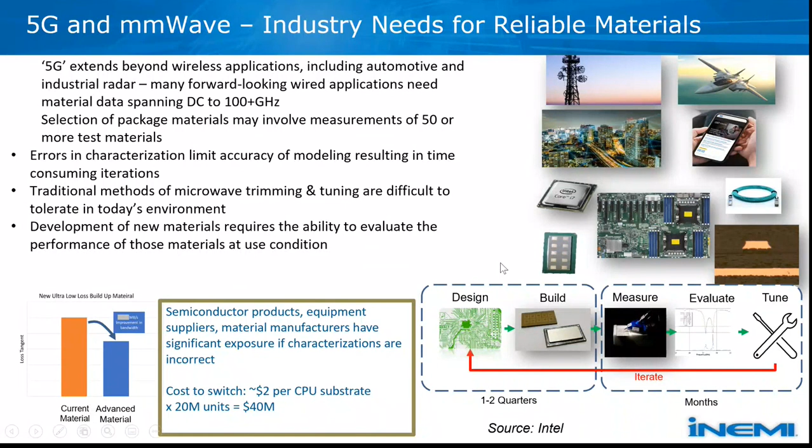And so what we said in the beginning is, what's really the problem statement? As I mentioned before, these materials pose challenges in that there is no consistent methodology for measuring key parameters such as the transmission loss and the permittivity of materials at higher frequencies. Throughout the industry, people have been using these materials, but there are many different characterization methods. Different approaches are used, using different fixtures, test methods, sample preparation, etc. And there was really a lack of consistency for data measurement as well as data analysis and extraction.

So in the beginning of the project, this industry group said, okay, we needed to come up with the following tasks. Firstly, we wanted to benchmark the current industry best practices, coming up with a report outlining the current measurement methods, reference standards, sample preparation, etc., which formed the basis for recommendations for how to reliably measure materials, which is actually in task 3.

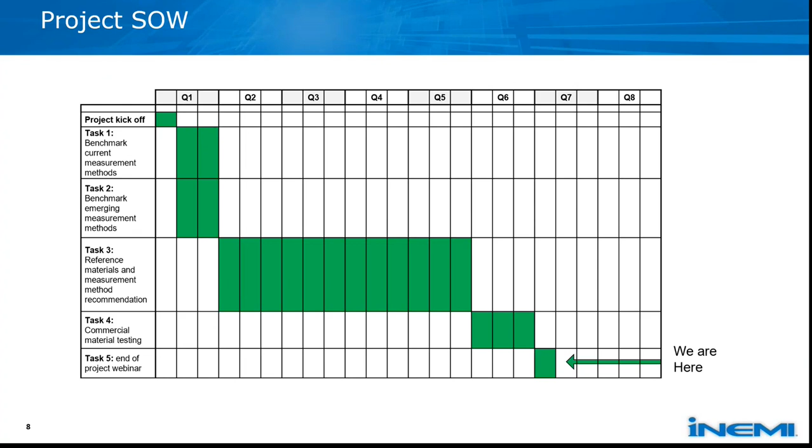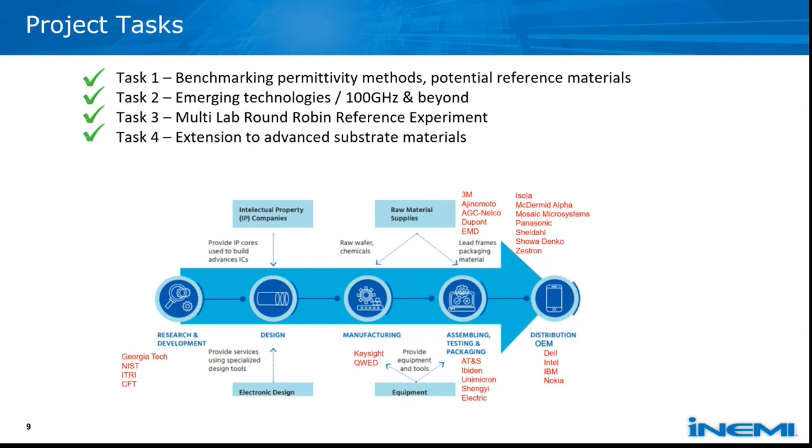So with that, I will hand it off to Marcena, who's going to take us through the next set of the presentation. Marcena? Yes, thank you, Urmi. I will say a few words about task 1 and task 2. And let me start, obviously, with task 1, which is benchmarking current measurement techniques.

Within this task, as you probably all know, with new material coming through the development process and into use, we need to carefully consider how to approach its characterization, which test fixture to choose, which measurement methodology will be the most suited one, how to fabricate the sample to make sure that we are getting high accuracy of our characterization. And of course, on the market there is a wide spectrum of available solutions, and the decision which to choose is not so obvious. So within task one, we wanted to benchmark the currently existing methods to answer some of those questions.

And we focused on resonant measurement techniques, which include split post dielectric resonator, split cylinder resonator, balanced circular disc resonator, and Fabry-Perot open resonator. All of those techniques span a very wide frequency range, and you can see how each of the techniques is situated over the frequency range. The most broadband, going up to over 100 gigahertz, are two of them, Fabry-Perot and BCDR methods.

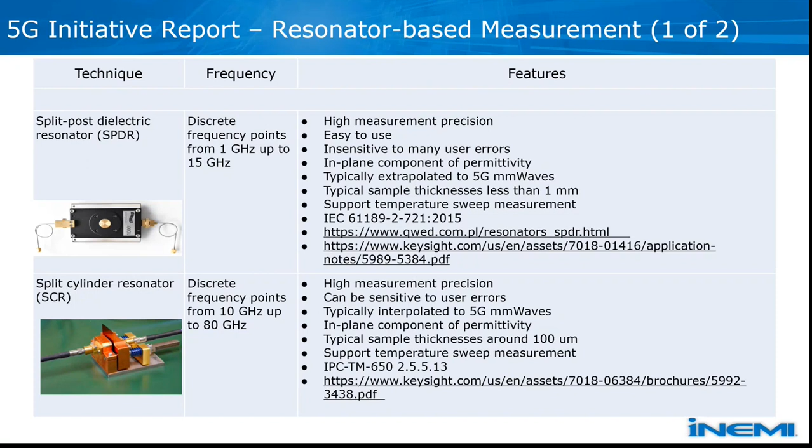The following two methods are concerned with the higher frequency range, and the first one is the balanced circular disc resonator, for which we get multiple discrete frequency points from a measurement, typically spanning from 10 gigahertz to 120 gigahertz. Again, we get very high measurement precision. The drawback here is that we need a full two-port calibration. What differs this solution from the others is that we get an out-of-plane component of the permittivity. But we also need two exactly identical samples for a single measurement, whereas for the rest of the solutions we need only one.

And the last one, the Fabry-Perot open resonator, is similar to the BCDR in that we get permittivity at multiple discrete frequencies from a single measurement. The solution that we extensively used was dedicated to measurements from 20 to 110 gigahertz, but commercially available solutions span up to even 330 gigahertz. The Fabry-Perot gives us high precision measurement, but it can be sensitive to user errors. It gives us in-plane components of the permittivity, similarly to SPDR and SCR, but some solutions allow for distinguishing the in-plane anisotropy of the material if it appears.

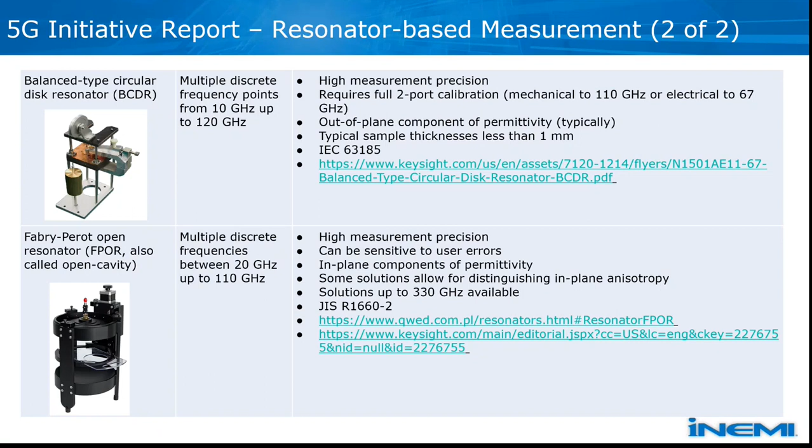So having all those devices, the question arises, if we can switch to another slide, the question arises how to validate the accuracy of those devices and how to verify them. We answered this question, and the conclusion was that we need a kind of standard reference material, which are stable materials, precisely fabricated, of known material parameters that we can use in each of the devices and then cross-validate those devices. And also validate against the nominal values of the material parameters of those materials.

We also made some conclusions or notes on the easiness of machining them, whether they are easy to machine, harder to machine, how we can easily handle them. For the COP, for example, we concluded that finger oil may somehow influence the measurement unless we are using gloves. So those are the materials that we concluded to be candidates for standard reference materials, and actually some of them were used by us in task 3 as reference materials for the round robin activities.

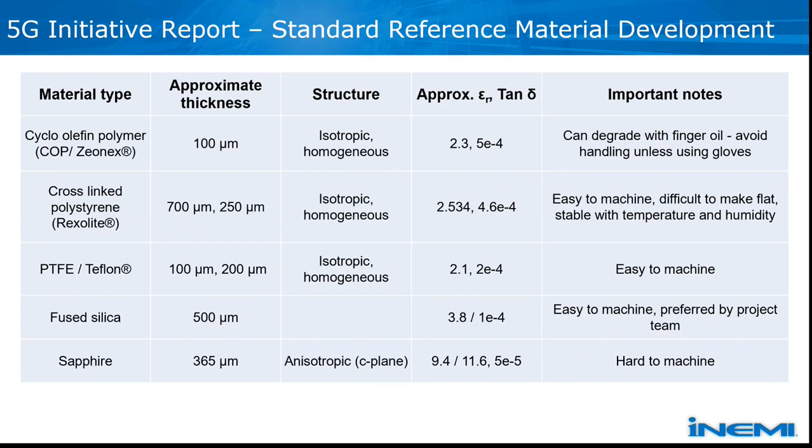If we can switch, yes. So having all those devices and already candidates for standard reference, we evaluated the sample dimensions. Each of the devices comes with their own requirements on the sample dimensions, both in lateral size but also the thickness. We have evaluated that. We have put that in the table, compared, and the challenge was to find a common sample size which will allow us to cross-validate, cross-reference between all the devices and techniques, and the sample size should cover the highest possible number of devices to make our study meaningful.

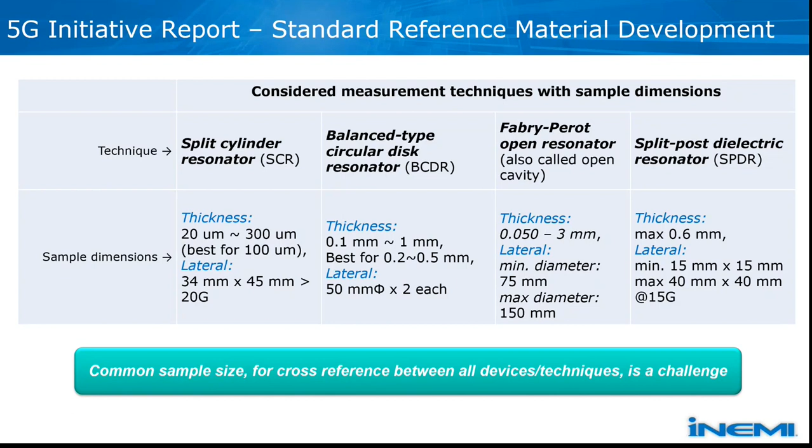So those were the main tasks or activities performed within task 1, which resulted in an extensive report giving all this information I briefly described. And the following task, which was actually going simultaneously, was task number 2, in which the benchmarking of emerging measurement and characterization methods was performed. This task aimed at distinguishing methods which are our future.

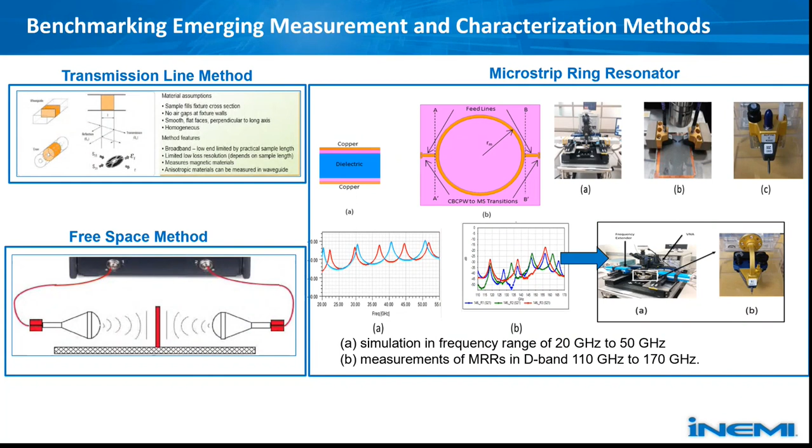The third one is the microstrip ring resonator. What you can see on the slide are examples of this kind of device operating in the D band, so between 110 and up to 170 gigahertz. So those are our listed candidates for higher frequency material characterization. And the one that is going even further is the time domain method, time domain spectroscopy, so TDS. What we can get from it is extracting the dielectric properties as a continuous function of frequency, in contrast to frequency domain methods, which we discussed in task 1.

And this method spans over a very wide frequency range, going up to even 2 terahertz. But what we need to be aware of is that the resonant methods considered in task 1 are well defined, well known. They are known to get the highest possible accuracy at the moment, and the new methods are a bit less advanced in terms of taking into account the uncertainty causes. For example, in the TDS method, we need to strictly account for the scattering effects which may appear on the sample, which may degrade our accuracy. But that's the future, and we hope this will continuously evolve and get us to a point where the accuracy of those higher frequency methods is high.

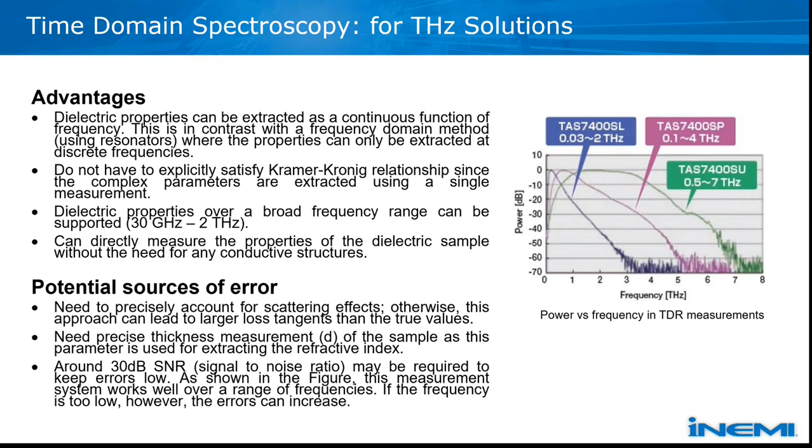And I think I can hand over to Mike to go on the task 3. Yes, thank you, Marzena. That was a really excellent summary. And now we transfer over to Mike Hill of Intel, who's going to give us the summary of task 3. So, Mike. Okay, thanks. So task 3 was the round robin experiment.

And as a reminder for people who have sat through some of these presentations before, we had 10 labs scattered across the world who had these 4 measurement pieces of equipment that were identified from task 1 and 2, the SCR, the SPDR, BCDR, and FPOR in their labs. And all of these labs have had a fairly large amount of experience doing these types of measurements with their own equipment sets. So we identified these as the candidates for doing the round robin experiment.

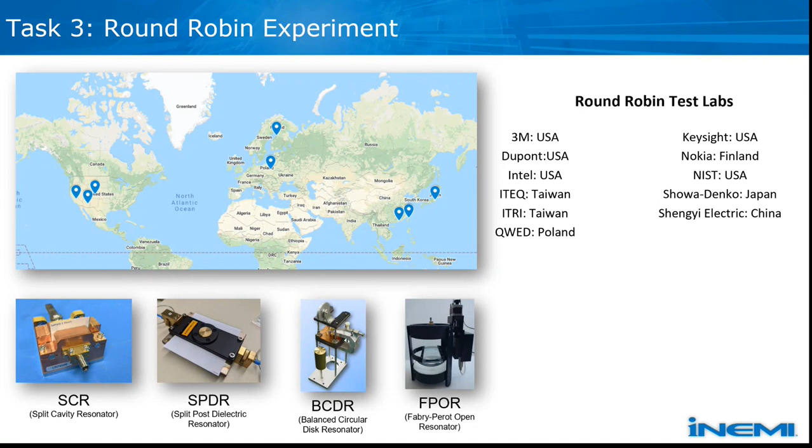We know that moisture absorption in realistic samples is a problem in terms of reproducibility, so we wanted to do this test with a very stable set of materials so we could really understand what the variability was looking across different labs, so that we could demonstrate the best case scenario in terms of extraction of material parameters to understand how well industry as a whole can do this.

So these materials were known, again, to have very little loss, very low moisture absorption. The expectation is that they have very low frequency dependence, and that was nice because we have methods that span everywhere from 10 gigahertz to over 100, and we didn't want to have a lot of frequency dependence that would confuse the data sets.

These are available in optically clear sheets, and that's important because it gives you some, guarantee is not the right word, but some confidence that the material surface properties are good. They're also available in appropriate thicknesses. That turns out to be a problem for some materials because these methods have some limitations in the range of thicknesses. And so these two are available in sheet thicknesses that are applicable to these different methods.

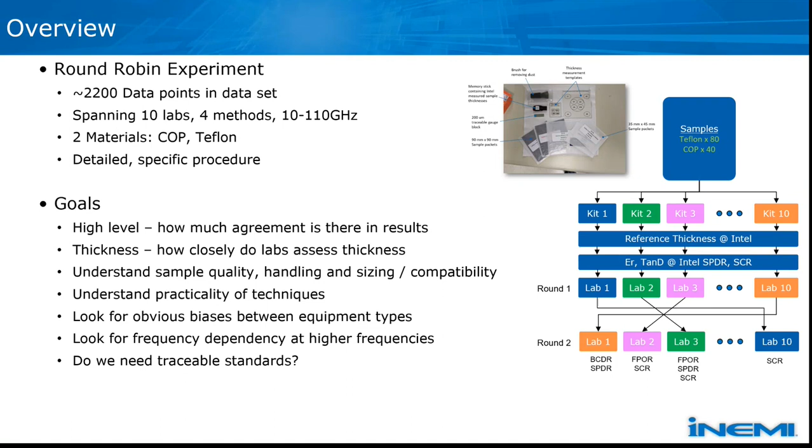And all of that sort of points to the question of, do we need traceable standards in industry to drive these types of measurements forward in the future? Okay, so if you go on to the next slide. This is kind of an overview of the results, and if you look back at the reports from this task, there's a lot of additional data and charts that have been broken out, and so there's a lot of detail. I'm just going to kind of cover the high-level results.

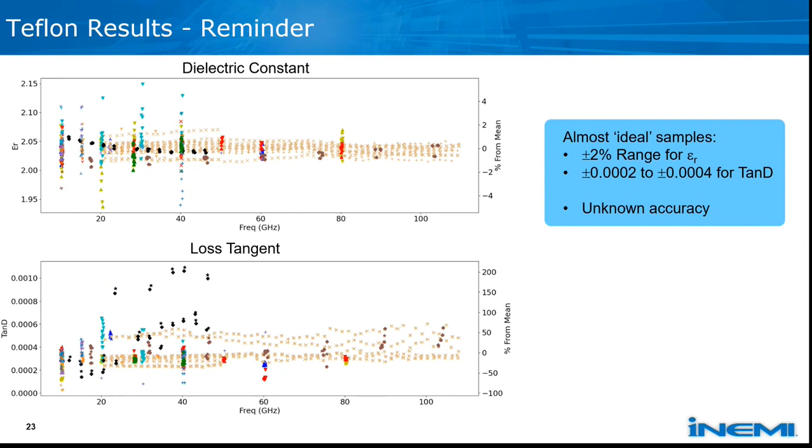But again, the message is the same, that if you want a precision result in terms of dielectric constant, we just really can't do much better than this today, because we have no reference standard with which to all agree upon a true value. Okay, next slide. So is this good? Well, the results are probably better than many of us expected. It turns out that getting reproducible results across labs for any metrology can be kind of challenging. Even within a lab, getting results that are highly reproducible can be difficult for challenging metrologies like these. But for many applications, this isn't good enough.

A plus or minus 2% error could cause a design cycle, or it could mean that your customer and the supplier could differ by as much as 4%. And again, this is really for the best case samples. More typical samples are going to have more variability due to issues like thickness variation. Further, if your mean value of characterization of your material samples has an offset due to these metrological issues, that can impact high volume distributions and can push more material into the fail region of your defect per million outgoing quality controls. So, within Intel, we would notice this kind of a miscorrelation with our design, and we would try and recenter it if we had this kind of an error.

So, there are reasons why we, as an industry, should be able to do better than this kind of a tolerance. And again, we're looking at perfect samples. So imperfect samples that are realistic material samples for substrate materials are going to provide more variability. And I also want to note that reproducibility that we've been talking about here really doesn't ensure accuracy. And this is an important thing, because if we had certified standard references, we would have an accuracy assessment. In other words, we could assess how accurate our final result is, as opposed to just what the reproducibility is.

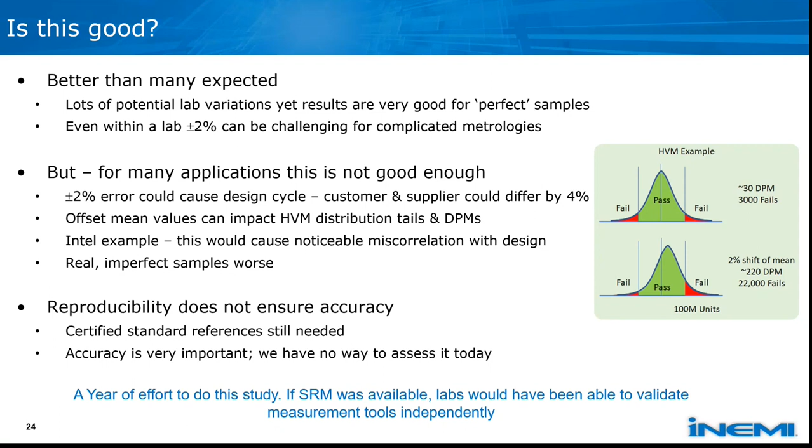So looking back at our goals, how did we do? Well, at a high level, the question was, how much agreement is there in the results? I said for these best case samples, you really shouldn't expect better than plus or minus 2%. And realistically, it's probably worse than that for realistic samples. So if you send your material samples off to a service lab to have them characterized, and the lab returns a statement that their results are more accurate than, say, plus or minus 2%,

you really need to understand that means that their own lab can probably have reproducibility better than 2%. It has nothing to say about accuracy or about the ability of another lab that also makes that claim to achieve the same result. So, realistically, you can't expect better than a couple of percent today.

Thickness. How closely did the labs assess thickness? It turns out that the labs were all using very similar micrometers for assessing the thickness, and we had in our procedure a description of a method where you basically average the thickness measurements of 4 locations on the sample, and we specified specifically where those locations were. And because of that, we yielded a very tight tolerance on our average thickness.

So we ended up with something on the order of 0.2 to 0.5% differences in the final numerical results in the thicknesses for each of these samples. And so that's really pretty good. However, it is slightly biased because we did very specifically describe where to take these thickness measurements. And this thickness does end up impacting the final results.

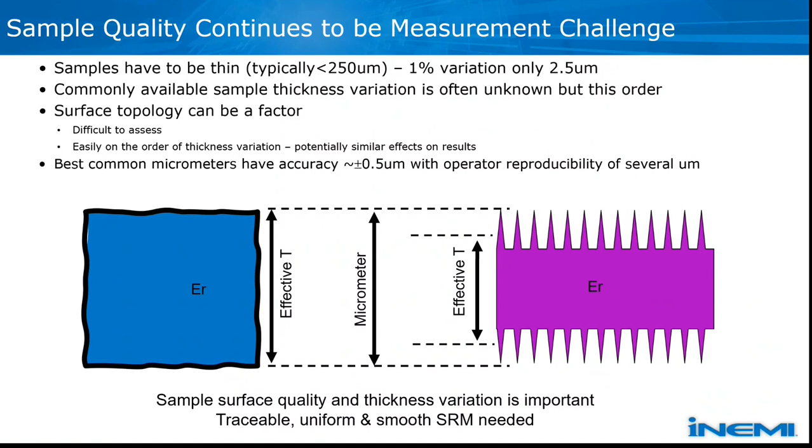And so this is something we need to keep in mind as we move forward, that the sample quality and the issues associated with thickness are probably a leading area for improvement. If you go to the next slide.

And in a lot of the measurement techniques, the fields that are used for extracting the dielectric constant are in a region that you can't physically measure with a common micrometer. Drop gauges can improve upon this, but they also have limitations. So this idea of assessing the thickness turns out to be an important place where we might be able to, in the future, make some improvements.

We also found that some of the techniques are sensitive to bows in the material samples. And so it's not always easy to make the realistic samples perfectly flat when you put them into the equipment sets. So moving forward, we probably need some advancements to try and address some of these problems that I've categorized as less interesting in terms of technicalities, but they're very practical and they lead to significant errors in the assessments.

And they generally affect all of the measurement techniques because all of them rely on understanding the material thickness and in most cases assume some flatness. Okay, if you go on to the next slide.

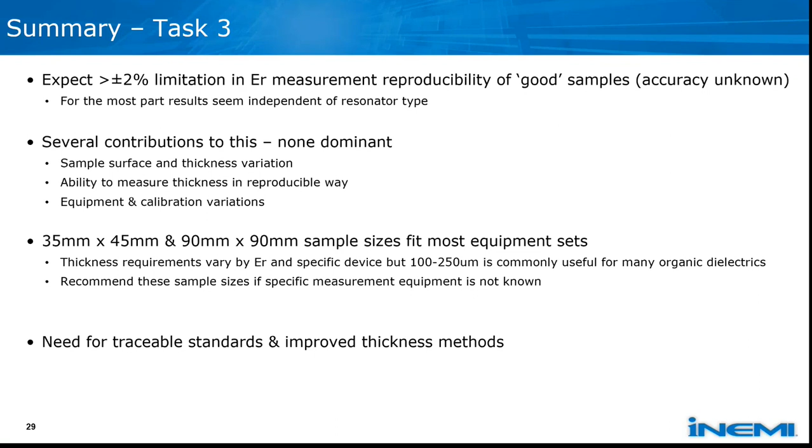And then you'll have a reasonable number of options at which to get measurements made. But the overall summary is that we really need traceable standards and improved thickness measurement techniques in order to drive these technologies forward and to make improvements in dielectric constant measurements. And with that, we'll move on to task 4, which is an overview of the realistic material sample measurements.

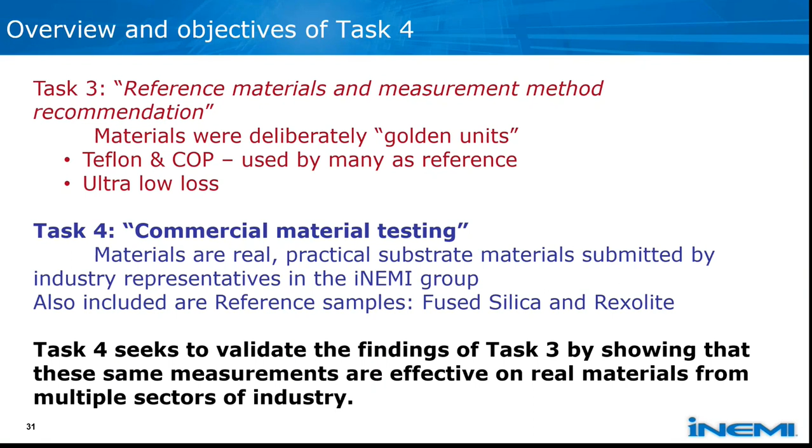Thank you. So the first sector of industry we really looked at was the electronics industry, which is really highly represented in this meeting. Our samples from the electronics industry, we had 34 of them, and they came from 7 different companies. And they had a broad range of thicknesses and dielectric constants within what's reasonable for typical substrate materials. So we had thicknesses ranging from about 60 microns to 300 microns, and dielectric constants from about 2 to 5. And these materials also added some anisotropic samples, which we did not see represented in the task 3 samples.

Additionally, you can see on the left a photo of the sample kit. And we had all of our samples broken into either 35 by 45 millimeter coupons for some of the smaller measurement setups, and 90 by 90s for the Fabry-Perot and BCDR instruments.

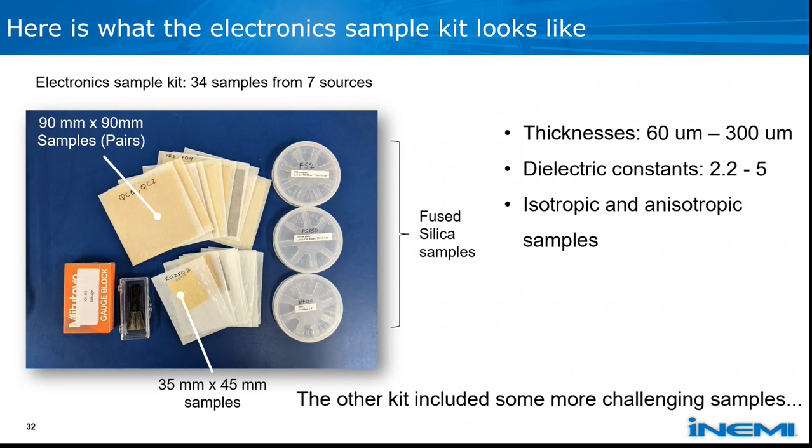Additionally, we had the automotive sample kit, which added a lot of challenges that we couldn't extract from the electronics materials. Shown here on the right are photos of the two clusters of automotive samples we had submitted. On the top are these bumper materials that were up to about 4 millimeters thick, which is obviously way thicker than our typical electronics materials, and added some measurement challenges.

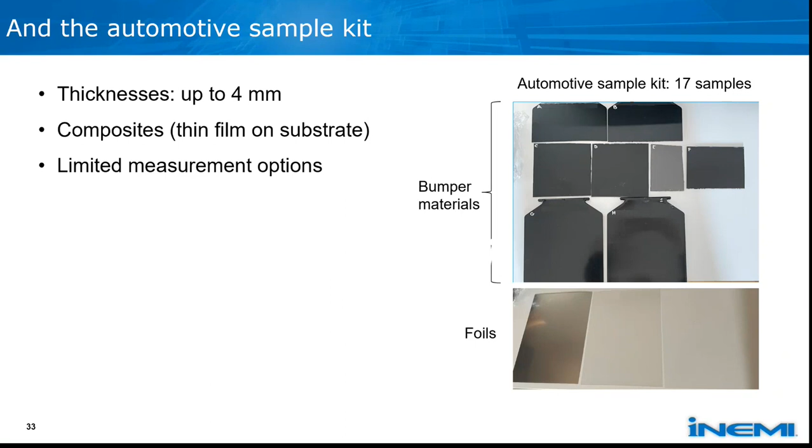And on the bottom, we had some of these foils, which were substrates, some of which had thin films on top of them. Those were between 100 microns and about 600 microns all told. And so both of those things, the thicknesses and these thin film composites, really limited our measurement options because they add a lot of complications that well-behaved traditional substrates don't. If you go to the next slide.

Thank you. So for task 4, we scaled down the number of test labs, mostly for efficiency and schedule. So there were 3 labs from the US in Keysight, Intel, and NIST. And in Europe, we had labs from QWED and Nokia. And while the labs making the measurements were only in the US and Europe, we had samples submitted globally from the US, Europe, and Asia.

So our key takeaways really mirror those of task 3, thankfully. The key two, in my opinion, are that with just 2 different sample sizes, the 35 by 45 millimeter samples and the 90 by 90 squares, we're able to sufficiently measure all of these materials with all 4 of our techniques of interest, the SPDR, SCR, BCDR, and FPOR.

Additionally, like Mike just highlighted, we really found that the thickness evaluation and thickness variation within a sample were both huge indicators of the kind of variation we could expect out of measurements on a given sample.

And with that in mind, we were seeing results variations in real samples on the order of plus or minus 2% to plus or minus 5%. Most of those, unless it was something that was anisotropic, are right around plus or minus 2%. Some of them even did better than that.

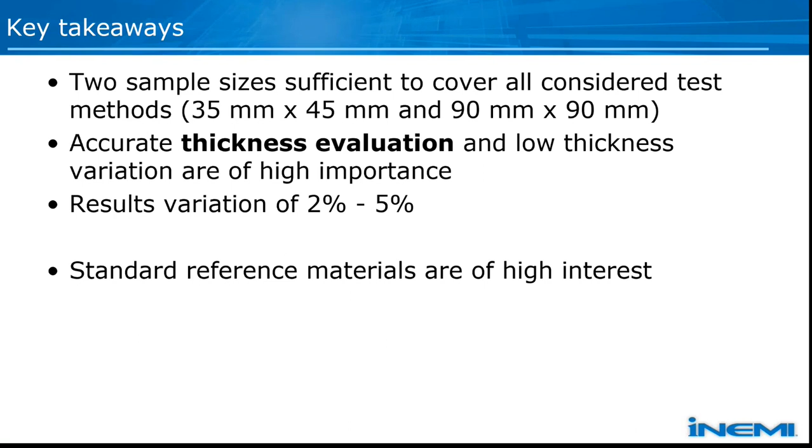So with that, a few really quick disclaimers. Compared to task 3, we have fewer labs, so there were a total of 5 labs involved in this study. And because of the instrumentation limitations, there was a maximum of three labs on any one physical sample. So to overcome that, we compared samples that were cut from the same sheet of material that was submitted to us. So we might compare a 35 by 45 to a 90 by 90 if they were cut from the same sheet of material submitted by any given company.

Additionally, there's a very large overlap in the instrumentation being used by each of these labs. There are only a few vendors that have these resonators commercially available, so there wound up being significant overlap in labs using SCRs and in labs using FPORs. Also, different from task 3, we are all using the same measurement kit, so sample to sample variation isn't quite as well captured. That makes it so we can more directly compare the microwave side of our measurements. But if you were to blindly submit a sample of your material to 3 different labs, that variation would not be captured in this study quite as well.

Lastly, there's an asterisk next to this one, but we're all using the same thickness measurements. Each lab did more or less make their own thickness measurements as well, but for comparing the microwave side of the measurements, we used the same thickness measurements from Intel so that we could really focus on the microwave side of things. This removes the variation coming from the different thickness measurement capabilities of each lab, because that's something we had already acknowledged was problematic. But like I mentioned before, we did also make those measurements at some of these labs, and I point that out in a later plot. If you go to the next slide.

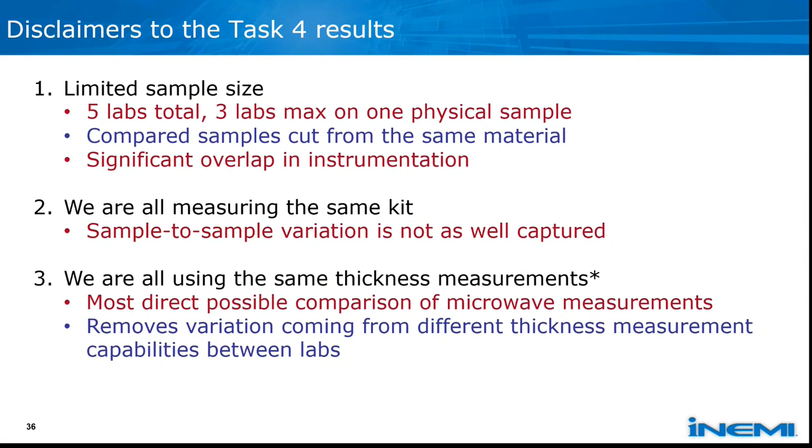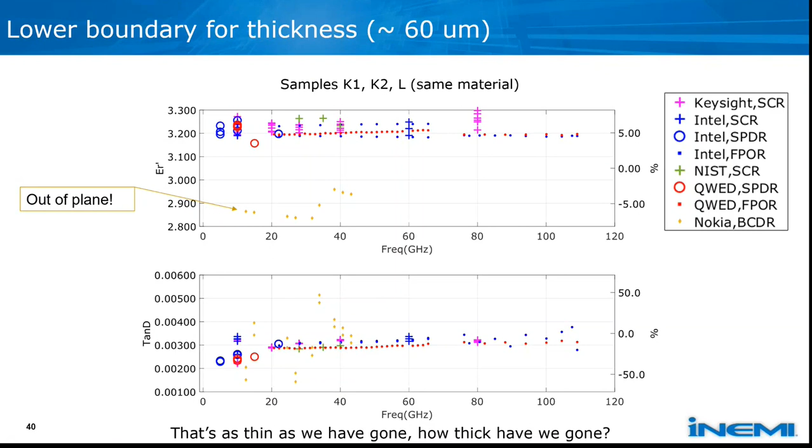And then something that I think is sort of exciting is that if we add in the BCDR measurements, which is measuring the out of plane permittivity, it's uniquely doing that compared to the other 3 measurements we considered. You can see this out of plane permittivity that's more or less 10% lower than our in plane measurements. But otherwise, they're all grouped very nicely. And additionally, our loss tangents are all grouped pretty nicely. So we've shown that we can measure really thin stuff pretty well.

Sorry, that was really fast.

The upper boundary for thickness at about 300 microns is also very conveniently our lowest permittivity. So I saved the chaos of one more slide. But this material, we saw pretty consistent results for any given physical sample. The biggest determinant in this one seemed to be thickness variation within samples and from sample to sample. And this material is something that is very known for being difficult to thin. It was something we kind of expected to have some thickness issues going into it. So to be honest with you, the fact that we wound up with a plus or minus 4% spread, I thought was pretty reassuring.

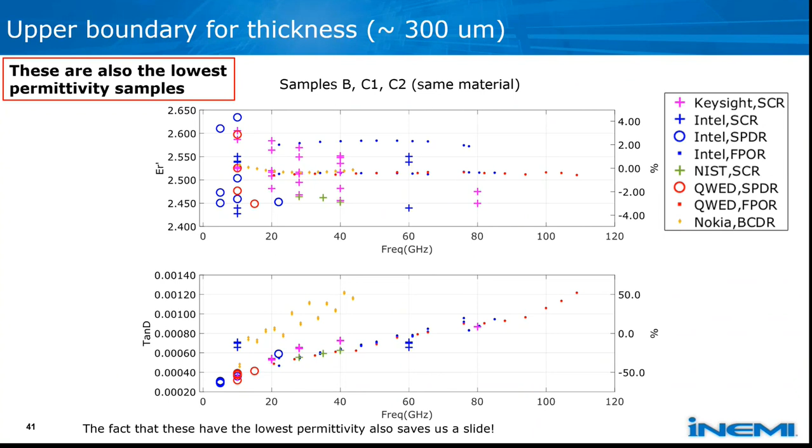So the upper boundary for the permittivity, because we just covered the lower boundary for the permittivity at the same time as the highest thickness. The highest permittivity material had a permittivity of about 3.8. It's very reproducible in that range. We had no problems with the high permittivity. And again, actually, you can see there's this large cluster of outliers at the bottom. And that is just presumably from the anisotropy being captured by the BCDR measurements. So it's really interesting to see that those fall out and land so nicely grouped at just about 10% lower.

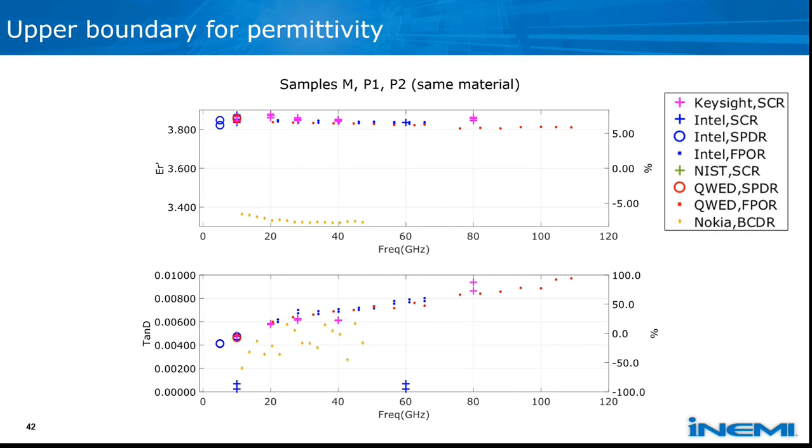We can sort of skip through this. Essentially, I was just impressed that we could measure the thickness test glass, which was just some sort of less well-behaved microwave material glass. And even while really pushing the limits of these resonators in terms of permittivity, thickness, and loss all at the same time, we were still able to get pretty good results up to about 40 gigahertz. And this just shows what happens if you really absolutely break your specifications on your resonators.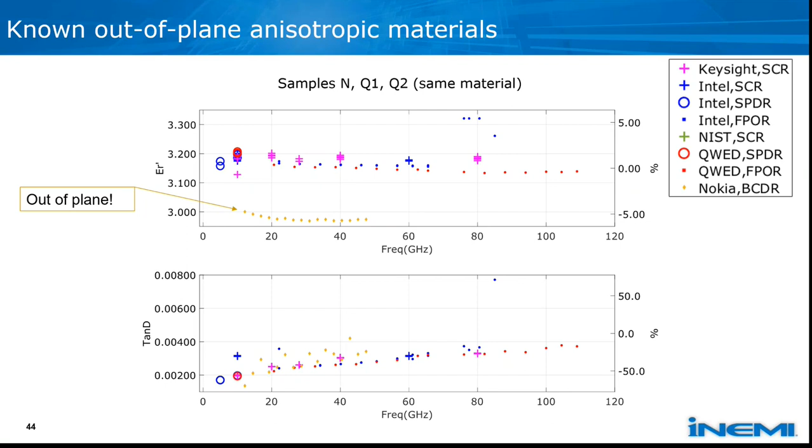Additionally, we were able to show that some of these materials had an in-plane anisotropy, so just rotating X and Y within the plane of the sample. We were able to capture that with the Fabry-Perot setups because that uses a polarized field. And so you can see on really the entire real part of permittivity plot here, that Intel and QWED's Fabry-Perot measurements, those circular dots, all capture two different orientations of the sample, and therefore show that we're capturing the in-plane anisotropy very repeatably.

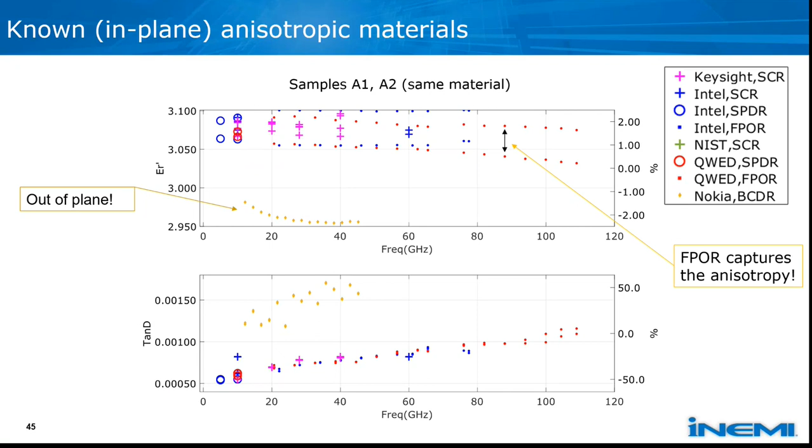And then I can't really speak excellently to these automotive samples, but just showing that we can make these measurements, with those ridiculously thick, 4mm thick plaques for the bumper materials, QWED was able to make measurements with their SPDR and FPOR with good repeatability. And those are on the order of real part of permittivity of 2.8.

Ermi, if you want to go to the next slide.

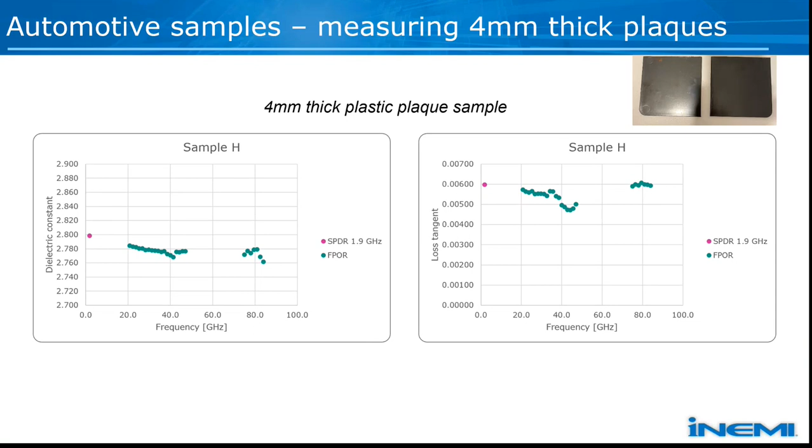The other really challenging samples included in the automotive kit were these thin film composites. So on the left-hand side, we're showing the real part of permittivity, the dielectric constant, and the loss tangent of the blank substrate, and showing that those are grouping pretty nicely. The BCDR points zero down into a consistent value, and the loss tangent seems to more or less

agree. And then on the right-hand side, we're showing that same substrate with a thin film coating on top, and showing that different effective in-plane parameters are extracted from the SPDR and FPOR, and then out-of-plane parameters are extracted from the BCDR. So really just showing that we can make these measurements on much more challenging materials.

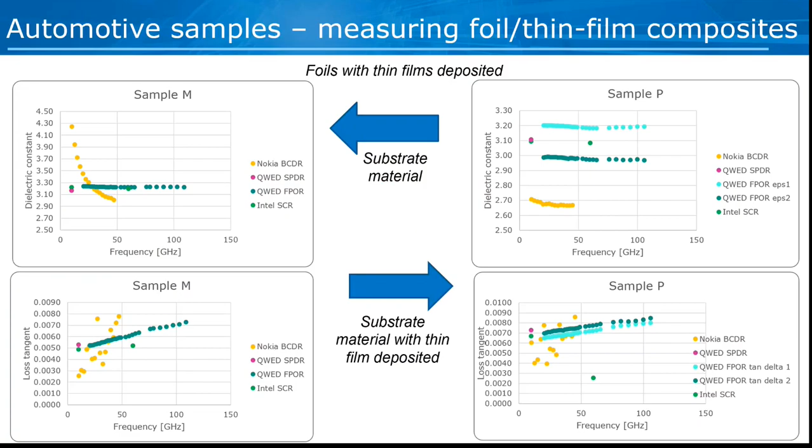All right, so again, just highlighting our key takeaways, we're able to measure the real materials just like we can measure the PTFE.

I muted myself at some point in that sentence.

Sorry, but the result variation is more or less what we saw from the candidate standard materials. It's maybe a little bit higher spread, and a lot of that is coming from these thickness challenges, whether it's the measurements in the thickness or thickness variation in the samples themselves. Thankfully, we didn't have any really unexpected challenges in terms of any of these materials having a shelf life or any of them being extremely difficult to handle.

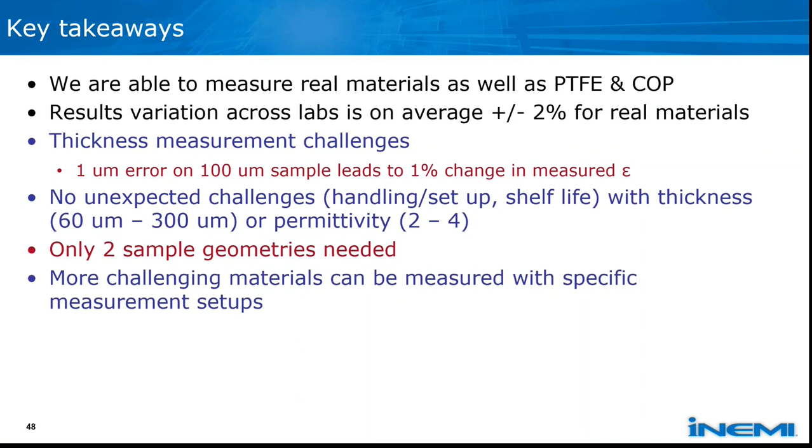And we were able to measure a broad range of thicknesses and permittivities, going from about 60 to 300 microns in thickness, and real part of permittivity of about 2 to about 4. And we were able to do that with just the 2 sample geometries, so it's really easy to prepare these. Additionally, we've shown that we can measure way more challenging materials if we have adequate time to develop these specific setups. Next slide.

Awesome. Okay, so Ermi, this is really your slide, but I can go through it. So the big limitation we found is that currently there are no NIST traceable standards. Previously, there was a standard for the permittivity and loss tangent in SRM 2870, but that was discontinued in recent years. Instead, we do currently offer standards for peanut butter and dry cat food. I believe there's also one for spoiled food. Not to take away from the value of any of those things, but it does seem silly that we don't currently offer something for these fundamental material properties in Rexolite.

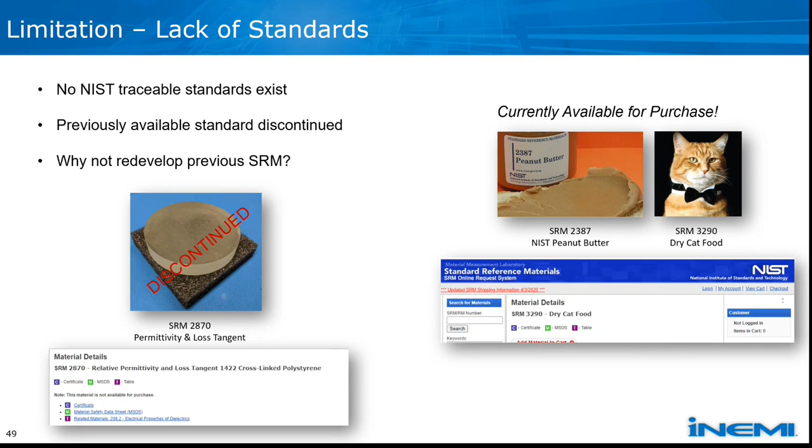So as an overarching question, why don't we just relaunch that same SRM? If you go to the next slide, we can discuss that in a little better detail. So the largest issue that I see is with that previous material. Sorry, if I can restart that sentence. It was very difficult to have them thin enough while maintaining a thickness variation practical for these resonator measurements that are relevant to these low loss millimeter wave materials.

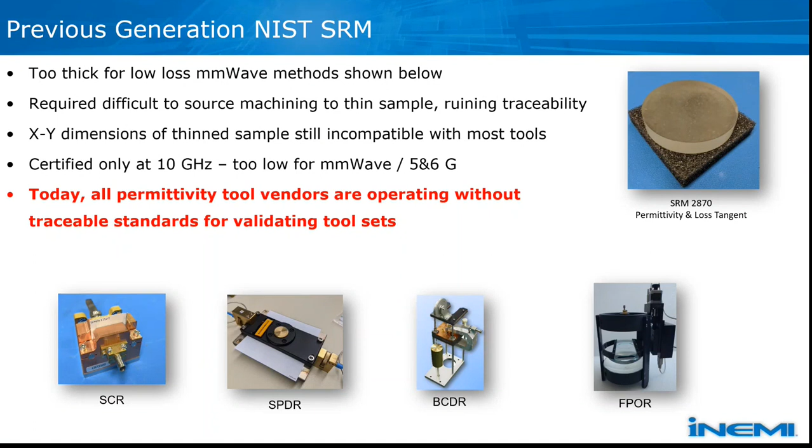Additionally, they're really only certified up to 10 gigahertz, which is way too low for the frequencies of interest for this group, being at millimeter wave, in that 20 to 80 gigahertz range. And so today, all permittivity tool vendors are currently running without any kind of traceable standard for validating their tool sets. They're using these interim standards, typically the COP and the Teflon, as well as some using machined Rexolite, which is the former standard, and fused silica.

So with that, where do we go from here? I'm going to shamelessly shill for the next iNEMI project, which I have a very personal interest in: the development of a traceable reference material for these millimeter wave frequencies with a particular focus on the 5G bands. There's a project kickoff on June 16th, which I believe will be a very similar meeting to this. You can certainly contact Ermi for further info on involvement with that. So thank you all for your time.

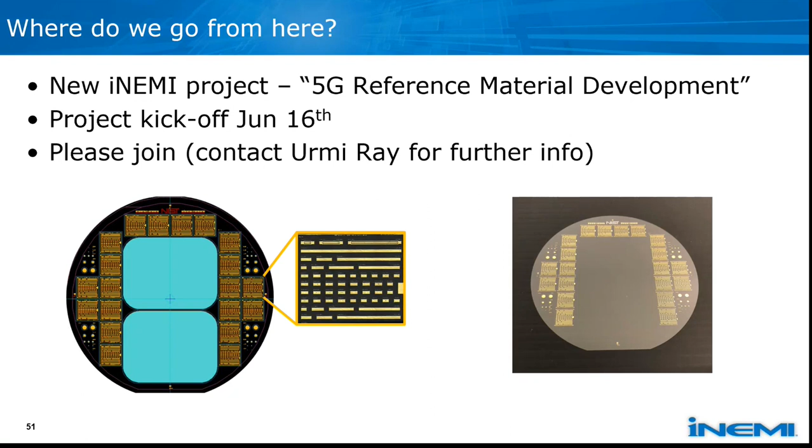Urmi, I think I can turn back over to you. Yes, thank you so much, all the speakers. I know we went a little beyond the scheduled time, but hopefully you can see the amount of work in this project, and what I personally am very thrilled about is multiple different groups participating in validating a lot of measurements. I'm also very happy to say that we have so many practical commercial materials also measured and demonstrated the validity of techniques, because this wasn't a research project. This is an industry sponsored project.